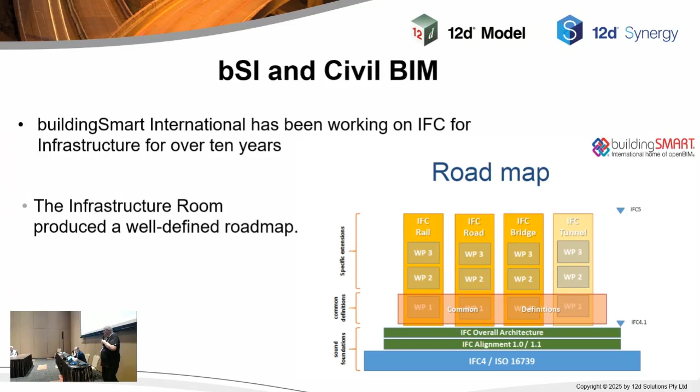Now, with civil, buildingSMART International got involved a bit before 2015. They came up with this infrastructure room where they had a roadmap of how they were going to build on it. They also had the various summits saying that IFC should be used at every stage of the project, from the very beginning right through to the very end. That really means it needs to include data from surveyors, concept and detail designers for road and rail, construction and handover. That's what they've been telling us ever since I first joined.

Right, have I got the right one up here? Yeah, that's what I'm seeing.

That's okay. But for the infrastructure, they came up with a roadmap, and basically it had a building where the alignment was at the bottom. Anyone in infrastructure has to align it because you use chainage and offset to reference everything. You don't use a grid.

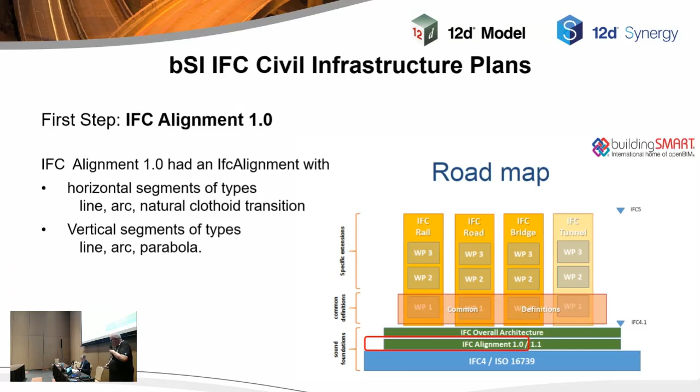So alignment 1.0 was the first thing we did, which had an alignment with horizontal and vertical segments. And basically it was done, and we actually showed that in 2016 in Korea. So that was going backwards and forwards, that's how long ago.

Next was alignment 1.1, which not only had that alignment, but also added in all the rail transitions, because you don't use the clothoid transition, you have other ones. So that was added in, and also tins for surfaces.

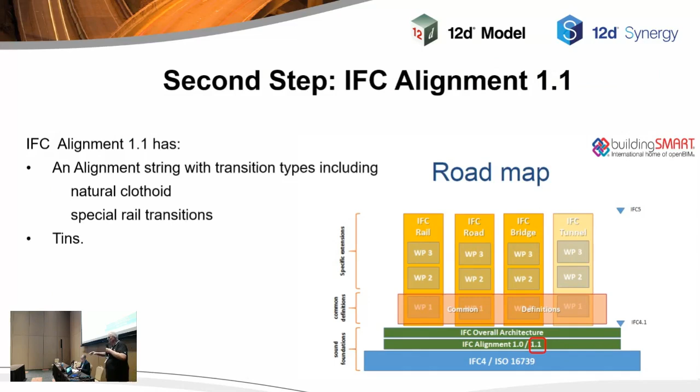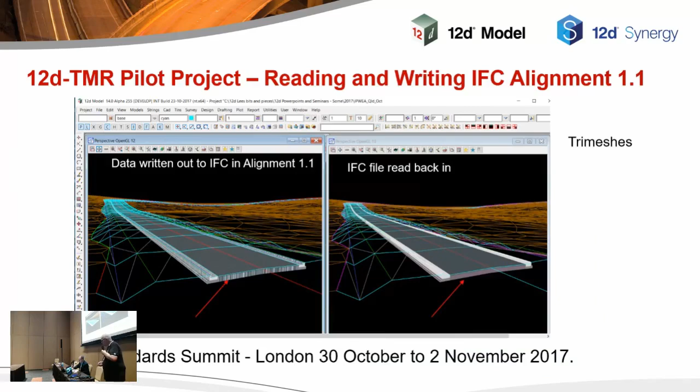So basically that was there for alignment 1.1, and the next year in London, we were passing data around with IFC 1.1, alignment 1.1, and you could pass all that sort of data backwards and forwards, the things you want for a linear infrastructure project.

IFC 4X1 came out in 2018, and it had that alignment, and it also had the triangulation. So that was out there for everyone to use in about 2018.

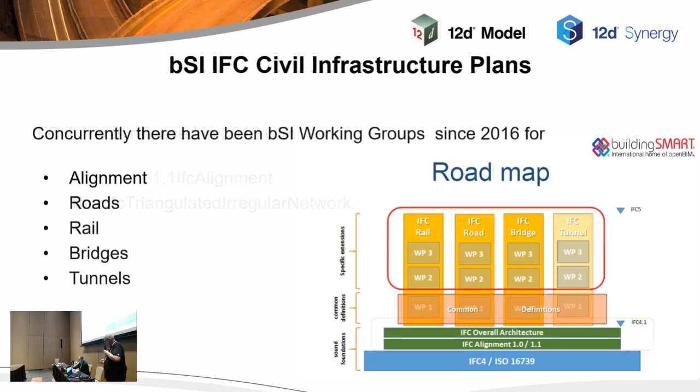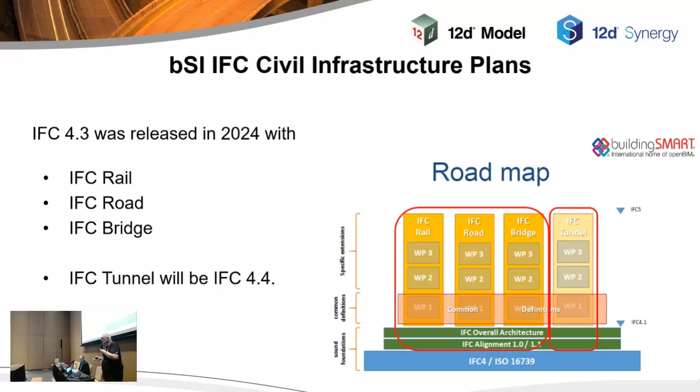At the same time, there were rooms working on alignment, roads, rail, bridges and tunnels. That's been going on concurrently at all these sessions. And 4X3 covered rail, road and bridges, alignment was part of it. And tunnels, that's going to be IFC 4X4, maybe. I think there's a bit of a discussion about that.

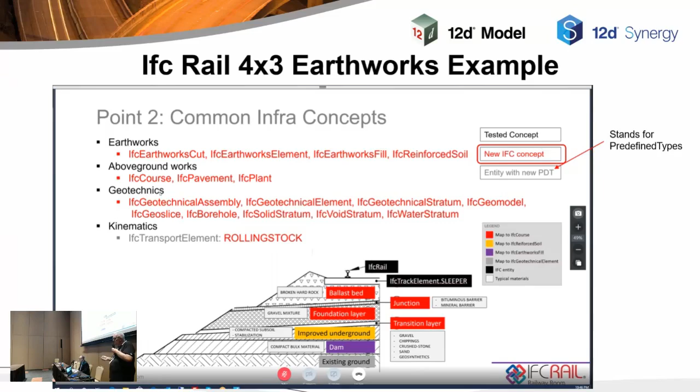What they did though, IFC 4X1 had all what we really needed. They added in a whole lot of other objects, so you didn't have to use building element proxy for everything. So there's things like pavements, things like that were added in. But if you're in the infrastructure space, we all have a name for things. So even if we use building element proxy, you just put that name in there, which you can do, and it tells you what it is. They just wanted all these things over, because some people complain, oh, we've got nothing but building element proxies, but you could still use those.

And here's a job that we did in 4X3, 3 or 4 years ago, and we passed it in 12D model on the left, and we passed across to ACCA's usBIM. And it went all across there quite happily.

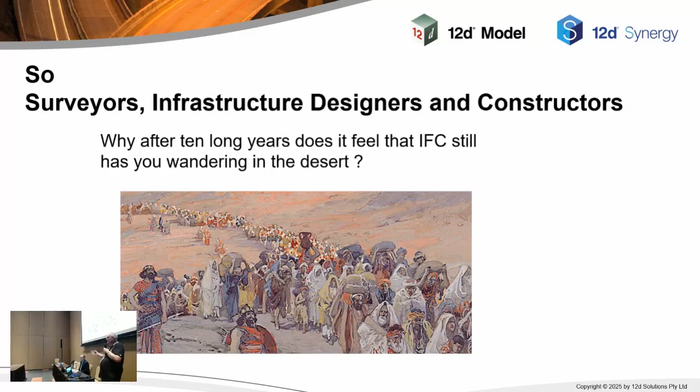Well, surveyors, designers, constructors, it's all there for you. It's all there for you. But why on earth did you feel that you're still left wandering around in the desert, that no one loves you? And basically, these IFC priesthood, they seem to have a special view of the world. And they do. They think the world is flat. End of story. That is how they look at the world. And they take that flat thinking and use it for infrastructure.

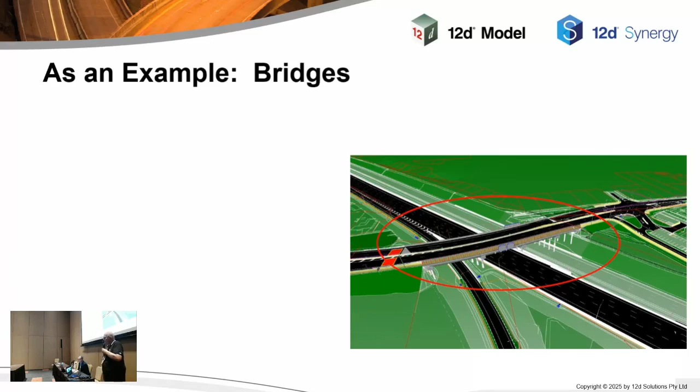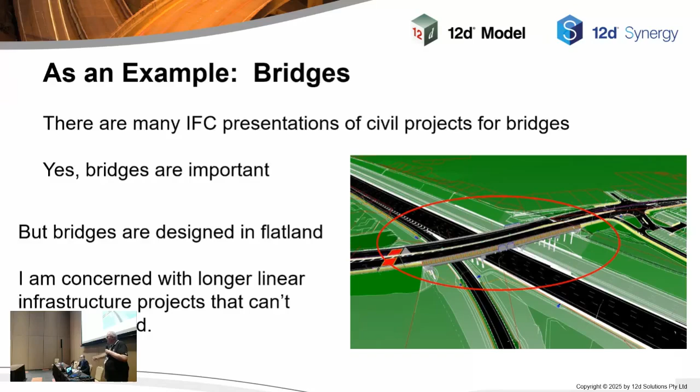Another thing you see a lot of examples are bridges. They trot these bridges out as being a fantastic example of infrastructure. Yep, they're valuable, but they're all designed in flatland. You talk to your people about what they do with a bridge, and it's usually designed in flatland. So it's not an example of what we're interested in, which is long infrastructure, road and rail projects. So throw away any bridges if they tell you that's what they're doing for infrastructure.

How did I get involved in this? Well, it was actually when two buildingSMART people came to see me, and they had a normal project. This is when I first learned about flatland. They had all sorts of weird problems there, like can't bring together different floor levels and stuff like that, which we never have in our area. They came along with this project. There's a couple they had, one at UTS, where basically they'd had all the buildings modelled and put them all into whatever they had. And when they got to the end of it, they brought in cadastral data, the boundary data, and it didn't fit. So they come to say, what is going on?

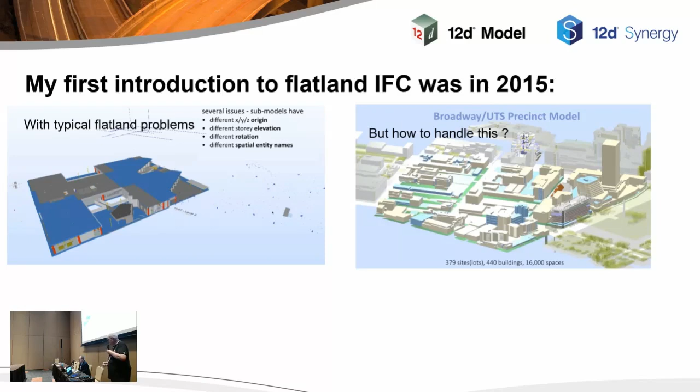Well, since you're all civil people, you'll look at that and say, there's a few things in there that building people never worry about. Basically, they've got a whole lot of sites in there, a whole lot of lots, hundreds of them. You need to know exactly where they are. Usually for a building, they've got one big boundary, end of story, go home.

The other thing is you've got large distances, and that calls up georeferencing. Georeferencing has been my passion here since 2015 when I first brought it up in the infrastructure room. And it pains me to know that I'm still having to talk about it.

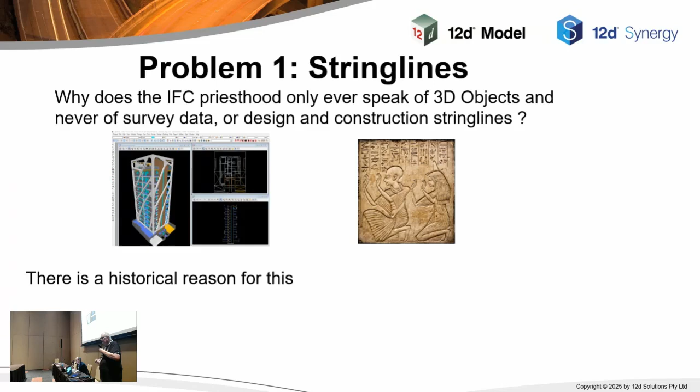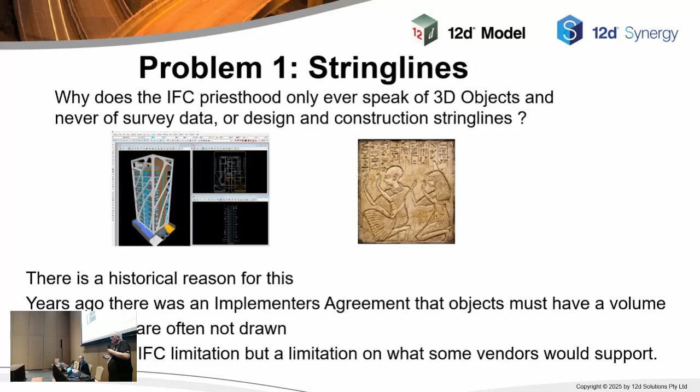Another problem is what we call string lines. In Australia, we call those strings. Again, the IFC priesthood never talk about string lines. This is like a polyline or something like that. Oh no, we only talk about 3D objects. You say, well, what's so hard about a string line? Again, I looked into this because I could never understand it when you give data to a company that they couldn't read it in. We had to put string lines out as little fat pipes. I've never seen a contour line that's fat. So what I discovered, there was an implementers agreement between the vendors that they'll only draw things that are in 3D. So I looked further into it about, well, yeah, what's going on here? Can we really do anything? Or is that the way the world is with IFC?

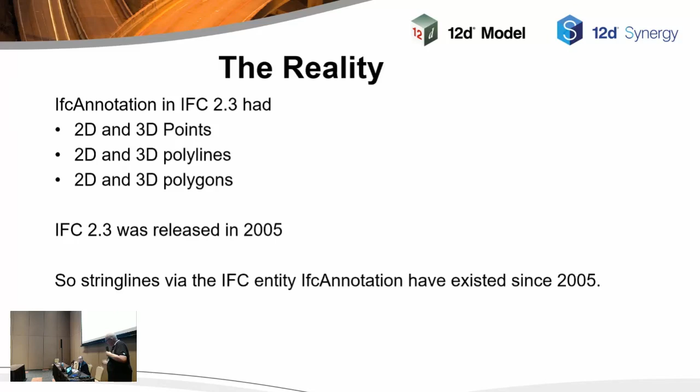And it turns out there's a thing called IFC annotation. It was in at least it was in earlier than 2x3, but it was in 2x3. It's got 2D and 3D points, 2D and 3D polylines, 2D and 3D polygons. So this stuff has been in there for at least 25 years because it was in even IFC 2. So they were there, and you can see how much building people thought about them. They called it annotation, that's all. It tells you, but they're there. They're there and they've been in the standard. And again, we've got a string line here, which we passed across to ACCA usBIM, and it comes across quite happily. So that does exist.

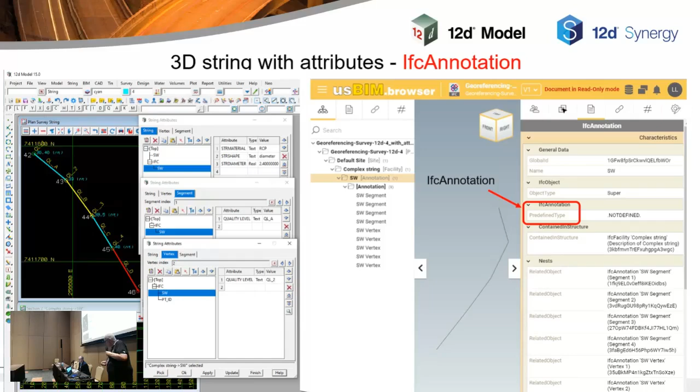The big tragedy of this buildingSMART looking at things is first GIS. What does GIS have? Basically, it's primitive. It has points, polygons, and polylines with attributes. And an attribute is just a property set. That's all it has. Lately, they've been able to take in what we call a tri-mesh. That's only new. So that's all available as IFC annotation. So you could have been putting that data out and they should have been able to consume it from 2005.

The next tragedy is machine control. Machine control, what does it want? Alignments, tins, points, lines, and polygons. They don't want this crappy 3D looking thing. They want to know a point where that bloody thing has to be dug. They want to know the edge of bitumen and stuff. Again, even alignments came in 2016, so that's all what they wanted. It's all been in there from at least 2016.

So I'll just go through a bit of a typical project, just to give you an idea. And since we don't have many architects and others, you'll know all about it. So this is a simple road. It was done in Sydney, 40 kilometres of dual carriageway. And always, these things aren't out in the middle of nowhere.

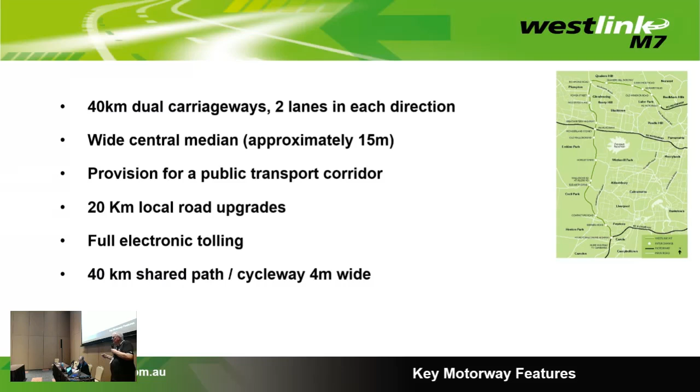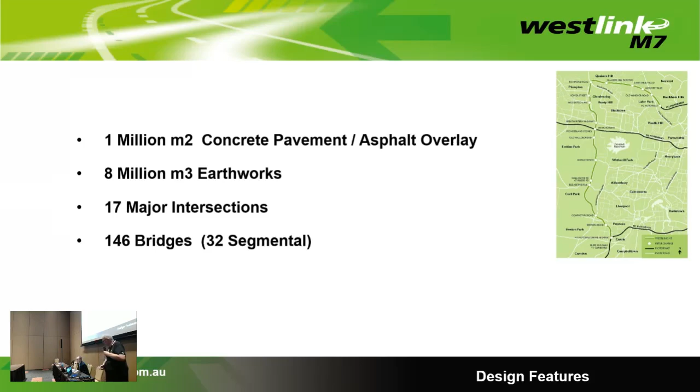They might be there, but they've still got to tie into local roads. So there's 20 kilometres of local road, and these days they have to throw in 40 kilometres of shared bicycle ways and things like that. So you've got about 100 kilometres of design going on this thing. There was about 1 million square metres of paving, 8 million cubic metres of earthworks, and 146 or so bridges. So there's lots of stuff in there.

They got 8,000 drawings. What did they do with those 8,000 drawings? Threw them in the bin. Useless. What they did instead - because the people doing design have had a way of getting 3D data around in Australia since the 80s - they went to the designers and got their string lines and their points and things. From that, they were able to construct all the layers for all the pavements and everything else. So they had a full 3D model to construct from. The drawings were a waste of time.

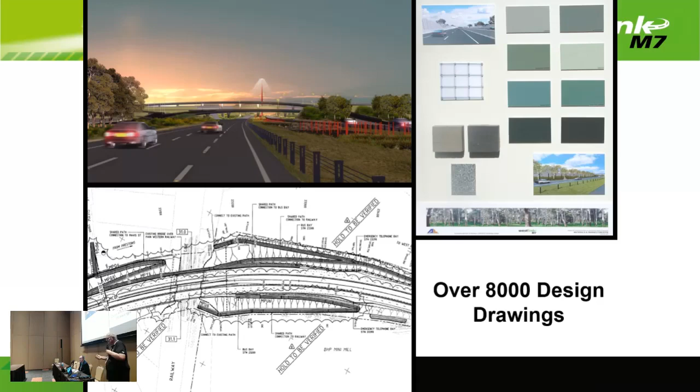Here's the difference. Here's one of the sites where they're building this. And the buildings people, it's usually a fairly small site with not much going on. Out there, you've got massive machinery. We restrict who goes on that site. You don't have all these bods wandering around, they'll get killed. Massive areas. So that's one difference that's there.

We've got to know where we are at all times, because you've got a 40-kilometre project, but you start at different places, so you've got to make sure they meet up. So it's very important to have the one coordinate system. And I tell you, when tunnels don't meet up, people really are upset. On the roads, it's not too bad - you can look and say, oh, I'm not quite there, and adjust a bit, but not in a tunnel.

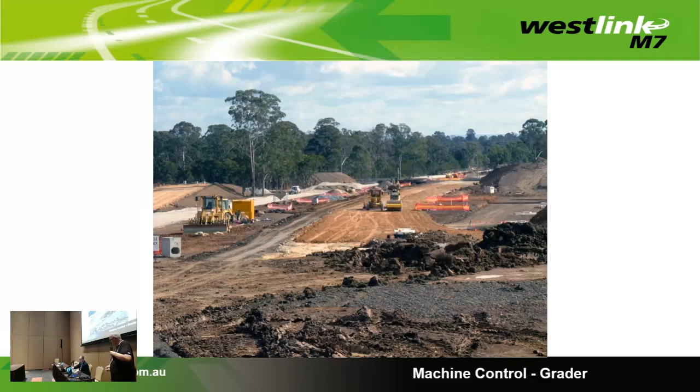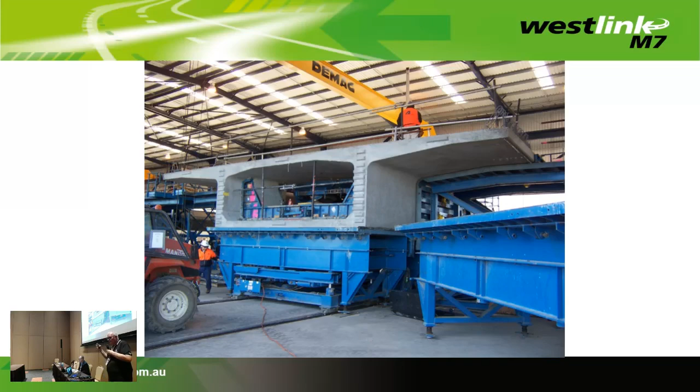So this is the sort of site we've got where there's nothing on there to tell you where you are, because it's all bulldozed down. They use segments of bridges - these are all different, every one. They built special machines to control them, and the surveyors made sure they were correct. They had to build their own substation there for all the power they needed. These are massive projects. Here they put those bridges in - this is one of the bridges things they were doing.

And when it came to the paving, they're using machine control for the paving. That's the sort of thing you've got to control. Now, basically when you do this stuff, the finished surface has to be plus or minus 10 millimetres, and they go around and survey it everywhere to prove it. So over the 40 kilometres, you can only be out in height by plus or minus 10 millimetres - you can't even get someone to swing your frigging door in a building to that accuracy.

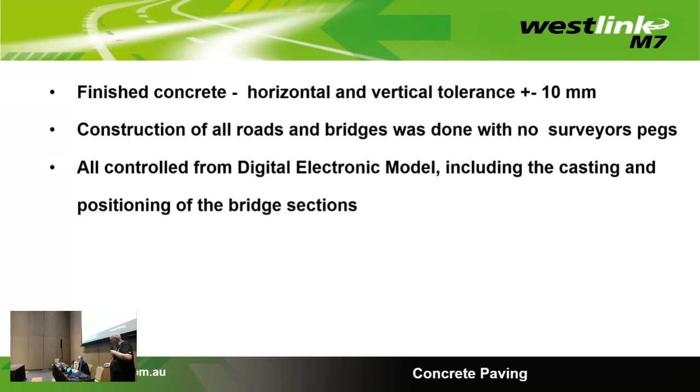The construction of all the bridges was done without survey pegs. All the control for everything, including all the bridges, was from a digital model, and set out for all the bridges. They saved $1 million in wooden survey pegs. And this thing was done in 2005.

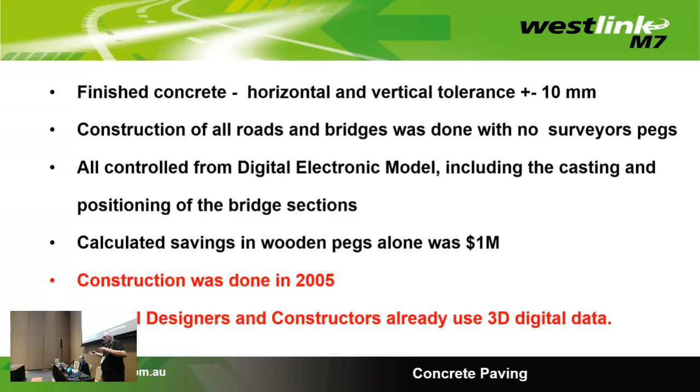So civil people, they know about 3D. They know about machine control. They've known about it since I've been in the industry in 1980 - we only design in 3D. The buildingSMART people who work with buildings mainly did 2D floor levels. We can't do that. We've got to worry about full 3D to design the thing, and we always have. So basically, you would have thought, with that background, it would have been simple for IFC to include all of us, because we know all about this stuff and have for years.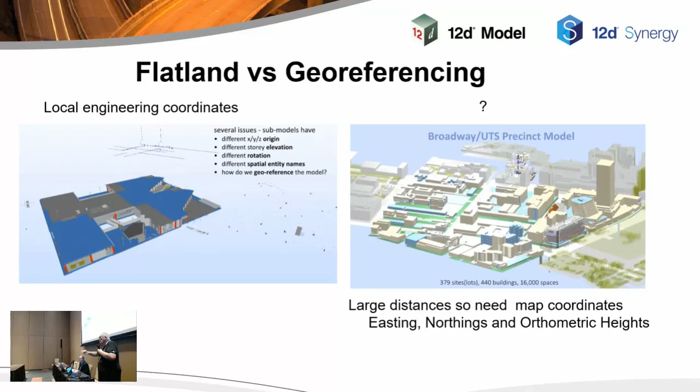So the first problem we had was cadastre and stringlines, which I've mentioned, but the big one is georeferencing. This has been why this thing has never worked, because they will not listen to us people about georeferencing. Basically, you have to have usually map coordinates - easting, northing, and a height on a project. One coordinate system for the whole project.

Now, in case no one knows, local engineering coordinates - that's usually what buildings work on. They put a 0, 0, 0 somewhere, and you measure things from that. So it's local engineering coordinates, usually working in a tangent plane. They even say things like the z-axis is perpendicular to the other two axes. No problem if you're working locally - even Einstein, my doctorate's in space-time relativity, Einstein said that locally everything's flat. Locally, special relativity works. If you're going much larger, you need general relativity.

As long as you keep in the small, there's no problem to be flatland. But just look at this - you've got a curved earth. You set up something on a tripod that's vertical, you shoot with a laser, it goes straight as a die. And if you look at that, once it gets out a bit, your heights are all wrong because it's curved on you. So you're going to be wrong if you don't allow for curvature of the earth.

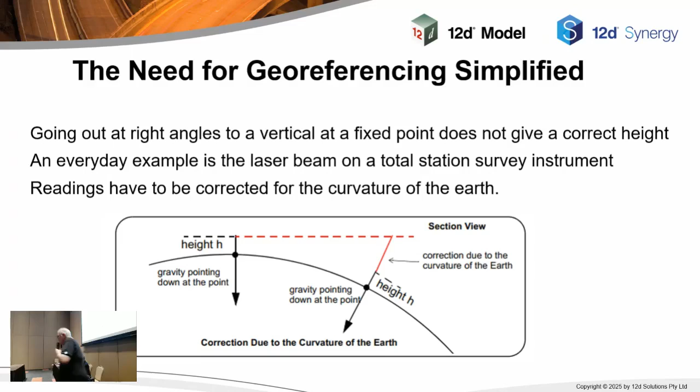Luckily, when you're using those laser things in the building, the distance is not very far, so it's not going to be too bad. How do we use georeferencing?

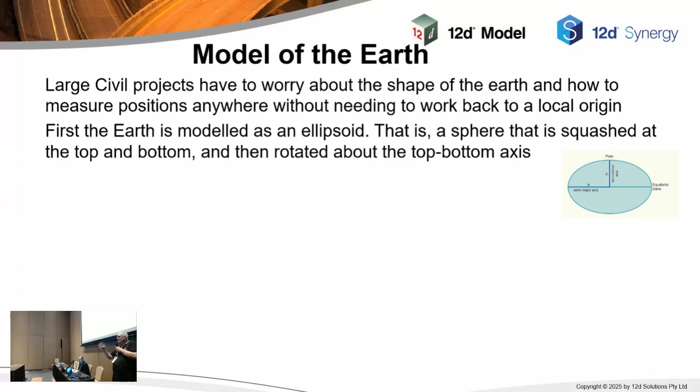We have to have a model of the Earth. What we use is an ellipsoid, an ellipse, which we spin around on the north-south axis. That gives us our model of the Earth. We then point the axis up to the North Star, because that doesn't move, so that fixes it for us.

We use one in Australia, which most of the world is using, GRS 80, and it's got a mass centre of the Earth, which was not used by many beforehand. They fiddled it to fit better their area, but we use the mass centre of the Earth because the satellites revolve around the mass centre of the Earth, and most people now want to use satellites. So everyone is now using this model. So if you're using GNSS, or if you're American, GPS, then mass centre of the Earth is what you need.

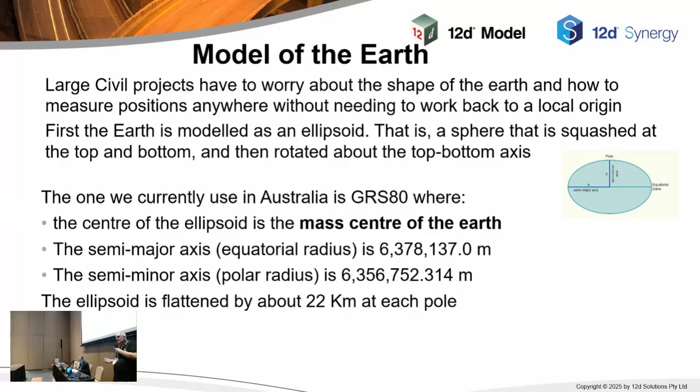And it's squashed a little bit, about 22 kilometres at the pole. But for surveyors, that will make a difference. Right, so we've got that model of the Earth, and we also need some other coordinate system.

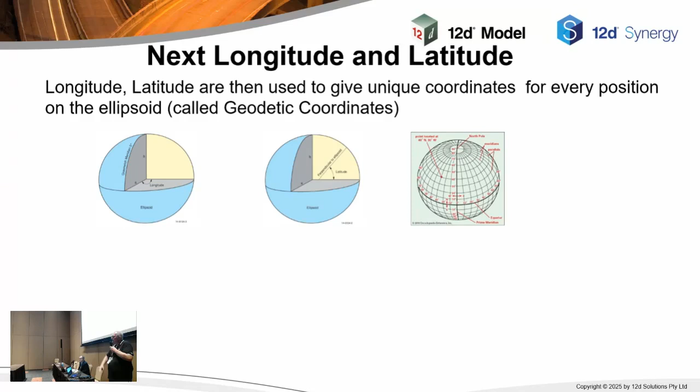For that, we all use longitude and latitude. Longitude, no trouble, great circles measured east and west of Greenwich. Greenwich is the 0. Halfway between the north and south pole is your equator, and latitude is north and south of the equator. Pretty straightforward, except of course, one time Greenwich wasn't it, they used to go through Paris.

So you have to know where your 0 is to play around with it. Those things are called your horizontal datum. So you have to know what your ellipsoid is and where your latitude and longitude are measured from, and that's part of your horizontal datum, which is all very good.

In Australia, ours is GDA 2020. One little problem - it is critical to know that. And the reason it's critical is that even in Australia, we changed models of the Earth.

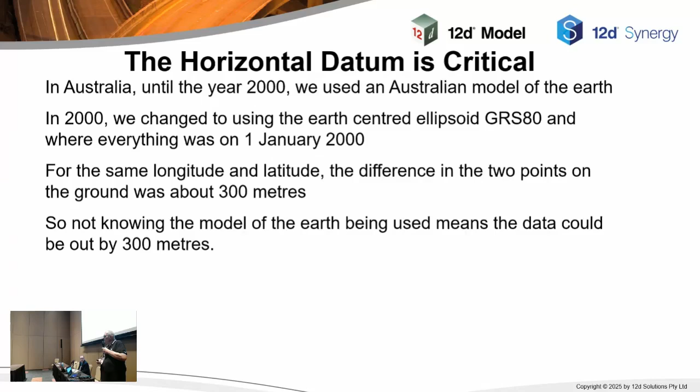Coming up to 2000, we had a different model of the Earth. And when we changed it, the longitude and the latitude of every point in Australia changed. If you use the wrong one, you're out 300 metres. So you really had to know what that was. We changed it again in 2020, where the difference there was about 1.8 metres.

Now, why on earth does it keep changing on us? Because of continental drift. Maybe if you're in London, you're lucky, but in Australia, we're moving towards the equator and away from London about the same rate as your fingernail grows. And over 20 years, that became 1.8 metres. And these days, if you're driving a self-driving car, you do not want to be 1.8 metres on the wrong side of the road.

Well, most houses in Australia are built up to 1 metre of the neighbour. So if you're 1.8 metres out, you'll be building on your neighbour's property. And that is not a good thing.

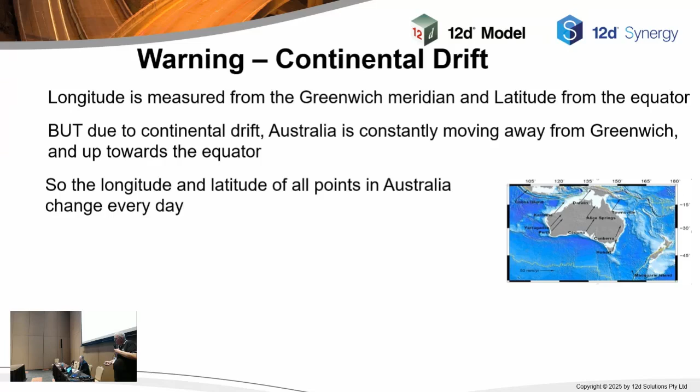So basically, for that, we not only have to know what model of the Earth, but we also have to know when your data was picked up. And that's called an epoch. Remember that word, epoch. For Australia 2020, it's where things were on the 1st of January 2020.

So when a surveyor goes out there and picks up data, he'll pick up what it is today, if he's using satellites. He then has to adjust it to where it was on the 1st of January 2020. So it's not quite straightforward what surveyors have to do, but that's all the information you need if you're going to use a horizontal datum. So all those things are needed, otherwise you basically won't know where you're going.

So I noticed they talked about, in IFC 4 I think, they said it's georeferenced - you've got a longitude and latitude in there. You need to know what the model of the Earth is, what longitude and latitude you're using, and what's the epoch. Otherwise, you could be out 300-400 metres at least.

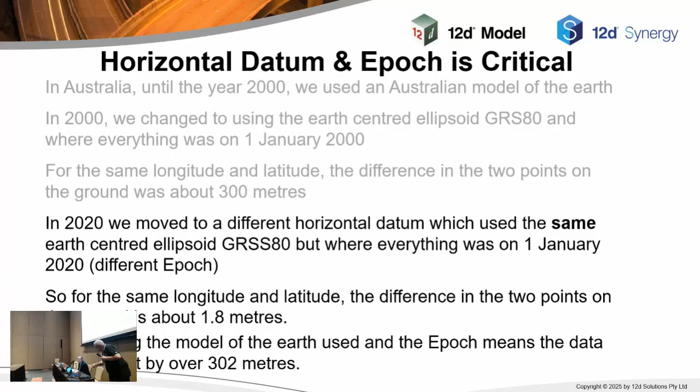Sorry, I'm having trouble reading what I've even got there. Yeah, it's saying the same thing.

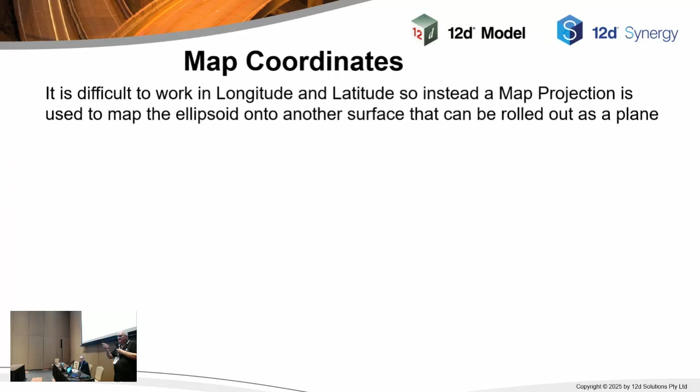Using longitude and latitude is very difficult, so we use what we call map coordinates. You take some sort of object that you can roll out on the flat paper, and you map by going through the centre of the Earth, through your point, onto that paper to give you coordinates. That's called map coordinates, usually called eastings and northings. You use different projections depending on your data—the conical one's used for Lambert, I think, for east-west coverage, and if it's north-south, you usually use the transverse Mercator.

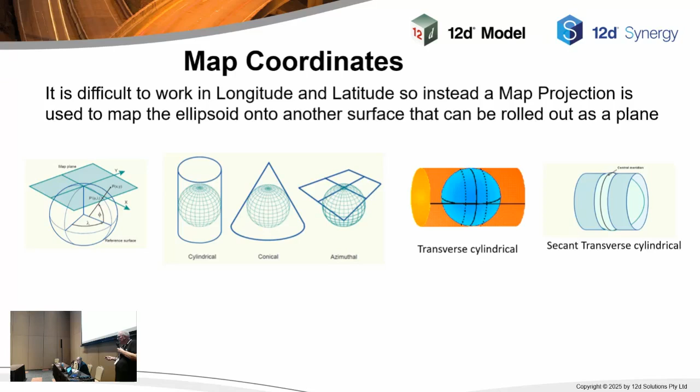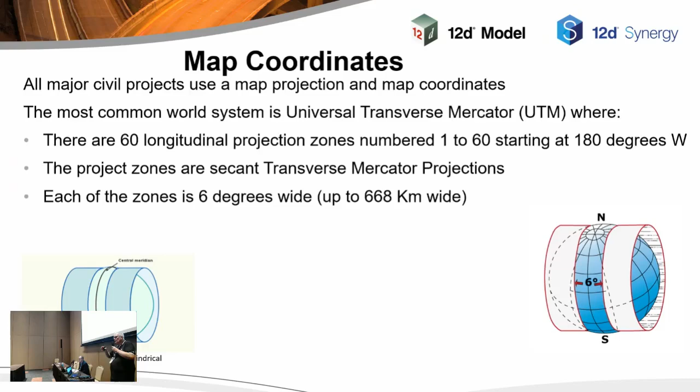There are all these different map projections you can come up with. A common one we all use is the transverse Mercator, called Universal Transverse Mercator, or UTM. It's a cylinder on its side, working in 6-degree zones. They've got a central meridian going around the Earth, and you go 3 degrees each side. It's only about 600 or 700 kilometres maximum, but as you go up toward the equator it's bigger, and toward the poles it's smaller. Once you have those, there's a zone—60 of them going around the world.

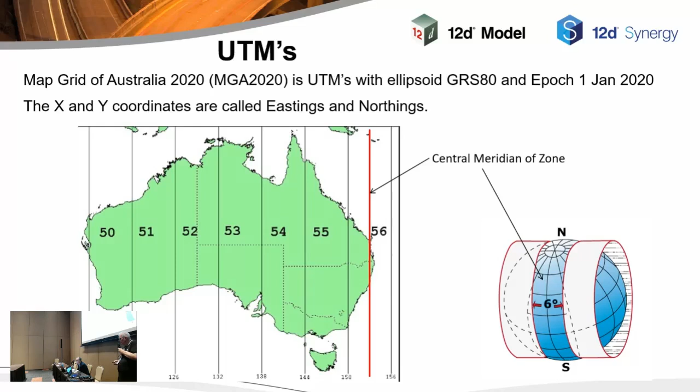The Americans had this after the war, I think—this is where it came from. But most of us use it, certainly in Australia. We go from zone 50 to about across there; there's a number of zones in there. Because we're fairly wide, about 3,000 kilometres wide, I think.

Anyway, UTM—that's a coordinate system. When you have map coordinates, this is what it's really about: you've got your flat bit of paper and your curve, and if you've got 2 points, P1 and P2, you go through the centre of the Earth and through that point onto your plane, wherever it hits—that's your map coordinate. If you look at the diagram, P1 and P2 map onto P1 dash and P2 dash. Now, the horrifying thing is that flat plane is your map coordinates, and the distance on the plane between P1 dash and P2 dash is different to the distance on the ellipsoid between P1 and P2. That's the horrifying problem with georeferencing.

It's even worse than that, and this came up in a talk earlier today. On that line that goes through the centre of the Earth, nothing's actually on the ellipsoid—you keep going up to a certain ellipsoid height. If you go up, say, to 100 metres on each of those points, the ellipsoid height means they'll be even further apart than before. But they all have the same northing and easting. So it's not just the northing and easting—height is critical as well.

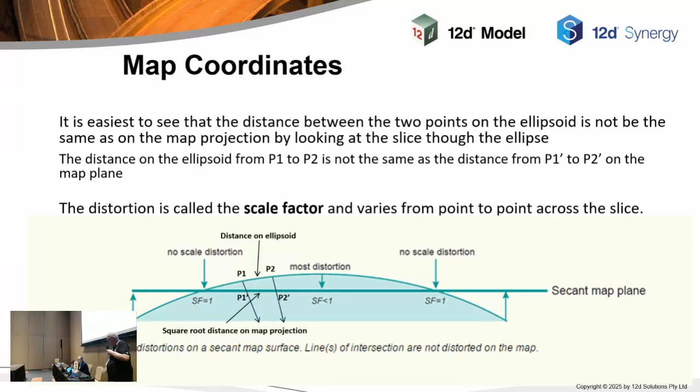So they call it a scale factor when you look at that ratio. People do quote some scale factors, but I'll tell you why most of them are wrong. In AMG/MGA, which is what we use, it's a UTM system. With that scale factor, 0.9996, it's out about 400 millimetres per kilometre. You wouldn't think it's very much, but if you're working in tens of kilometres, you're out by metres. So that has to be remembered.

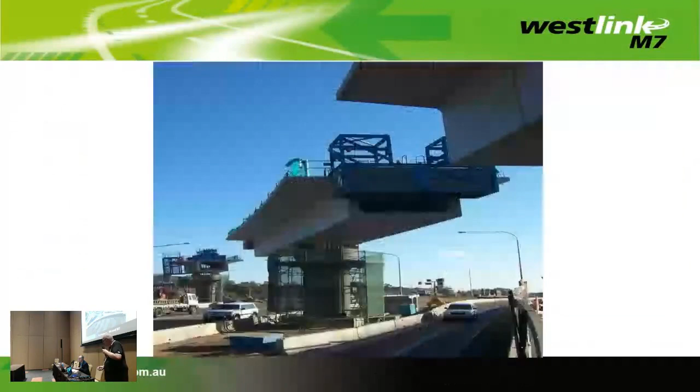Now, I did not put the hard stuff in there. The hard stuff is it does depend on height, so you also have to take height into consideration. And then you don't actually have just a scale factor—it's a combined scale factor. So you have to combine the two to go from one to the other.

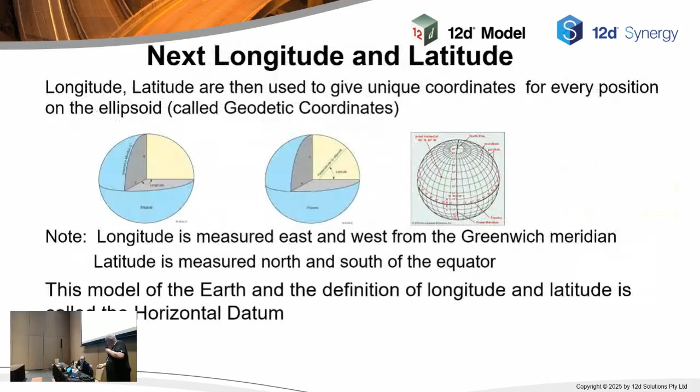Gone too far back. Yeah, I'm coming forward, aren't I? What slide are we on, do you know? No, I'm not sure.

Oh, look at that. Quick reviews just so I can test you out. Right.

So you do have to worry about heights, but it's worse than that. Where I spoke about there was ellipsoid height, but no one uses ellipsoid heights. We use orthometric heights, i.e. the way water flows. If you used ellipsoid heights, water would sometimes have to flow uphill. We use the gravity model of the Earth to give you your heights. It is not perpendicular to your ellipsoid, so there's another correction coming in.

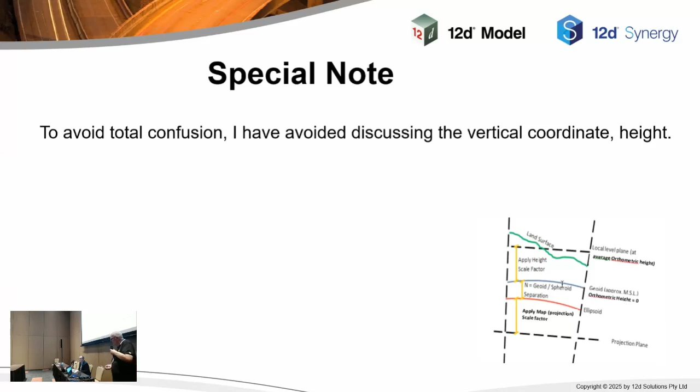So when you start talking about heights, it's different again. You have to have a special vertical datum to say what you're using, because we don't use ellipsoid heights. So basically, with this stuff, do not be overwhelmed. Most civil designers and things like that do not understand it either.

I don't like putting water in new electrical equipment. I have a tendency to knock it over.

So this was not a problem at all when surveyors handled it. But people like buildingSMART and that, they start talking about large projects, digital twins. You can't have a digital twin in flat Earth. You have to have it in coordinates. Talk about GIS, it wants map coordinates.

So it was all very good when you didn't try to bring data together. Most of you will have seen disaster when people bring in data from different projections and things like that. Now, I was in one talk many years ago, and a person said, look, we worked on the cross-city tunnel, we just did that in flat space.

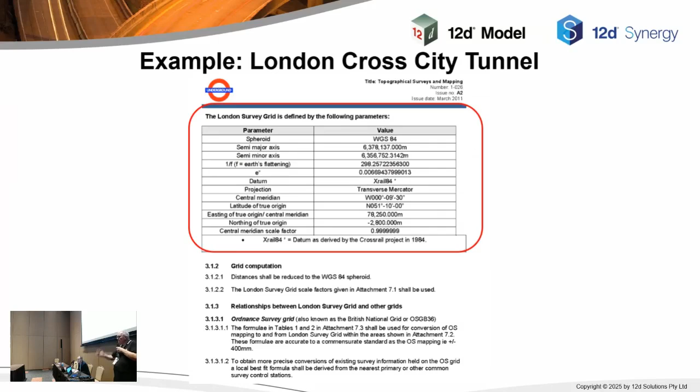I thought, oh, yeah, right, maybe. So I went and looked up the things. But if you look and read the survey brief, it tells you, you are working in a map projection. It even tells you what model of the Earth you have to use. And they fitted it a bit so it works well on the London thing, but they were all working in a map projection. Most of them in the room did not know that. They even gave you, along the route, a correction in parts per million that you have to adjust for.

So that was all there. And when you're putting out buildings, they had marks everywhere that you had to use. You can only be out by about plus or minus 5 millimetres, so it had to be very, very exact. But most people did not know. That was worked out for them by the surveyor.

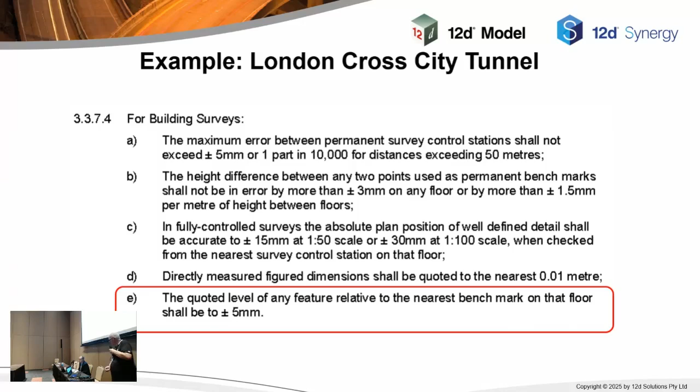So the horrible truth is, in summary, if you've got map coordinates and you work out the square root distance between them, that is not the same distance as on the ground. So you get really screwed when people pass data backwards and forwards and wonder why there's a difference. Now, in timing here, I'll jump over some of this. So basically, you've got to be careful and know what you're doing.

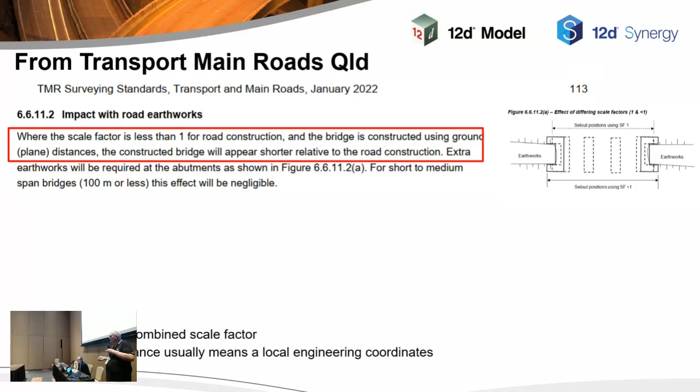The people, why would they know about this? Well, even the main roads authority for the last 100 years or so have had in their book that if you've got a bridge, which is usually done in flat land, and you've somehow moved across to your map coordinates, depending on the scale factor, it could be shorter or longer. You've got to worry about that, and it affects your earthworks. So it's not as though this is hidden away, it's in their survey manual.

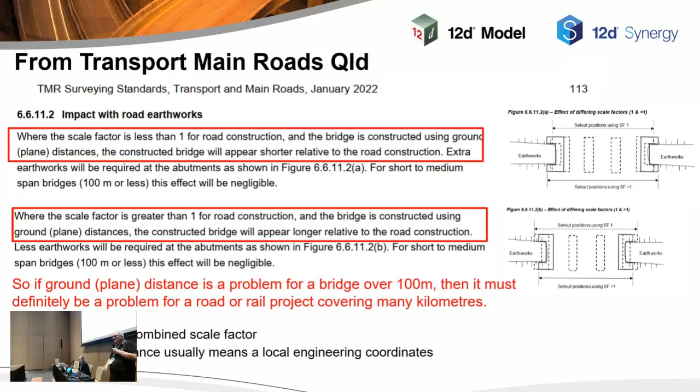So be very, very careful. If your BIM manager does not know about this problem, then they've come from the buildings world, the vertical buildings world. Tell them to go and learn about georeferencing.

So it's critical, absolutely critical for your georeferencing, because all our projects... well, I'll ask the audience, are your projects in map coordinates? Who's not in map coordinates? Do you get trouble when your buildings people give you screwy data? I bet you do.

So basically, you need to know your horizontal datum, which includes the epoch, and your vertical datum, the map projection, and your zone number. You need all those things to uniquely give it. And so basically, that has to be provided for a project to be able to nail it down.

Now, you may wonder why these map coordinates are used and what the relationship to longitude and latitude is. I didn't say, but you can map uniquely between them. So if you know the map projection coordinates and all that information, you can get back to a unique longitude and latitude on the world.

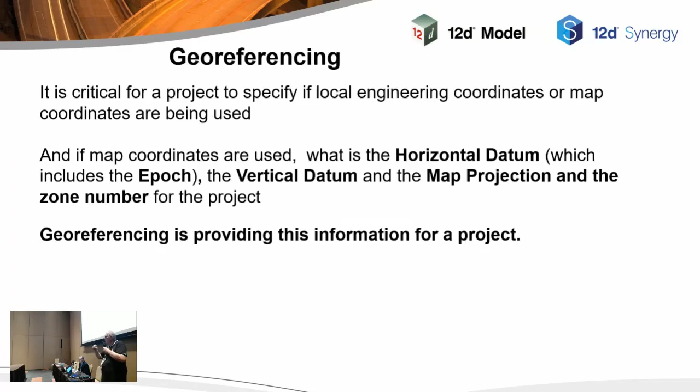So they're equivalent, they're equivalent. You've got all that information.

In IFC 4, I think it was, there's a thing called IFC Projected CRS. Basically, it had the horizontal datum, the vertical datum, a map projection, and zone number. So if there's an IFC Projected CRS, it should mean that in your project, when it's read in, everything is in map coordinates. That's been around for a while.

There's another little thing they had to put in for 4X3, because you couldn't have just Projected CRS, you had to have one of these other objects. They made one called IFC Rigid Operation, and basically this has a translation in X, Y, and Z.

So how that was actually used is that what we use even in Australia at times, and we do this for bridge people, you take your map coordinates and you chop off the whole lot of the leading digits so it's much smaller. You give them that and they work on it thinking it's flat Earth. And what you need, so you're going to translate your data, if you have data that's been truncated properly, you need a delta X, Y, and potentially Z to bring in the proper map coordinates.

So those things are allowed for, and using those two things you've got two cases. If your coordinates are in map coordinates, all you need is an IFC Projected CRS, and you also have an IFC Rigid Operation, but it's just a zero translation in X and Y.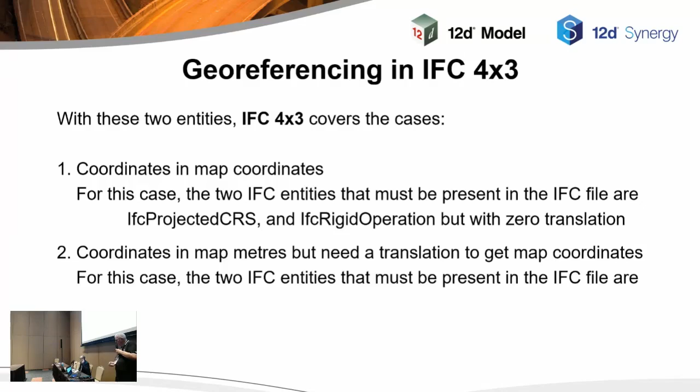You want your data to be absolute, so every coordinate in that file can be checked to see that it's correct and hasn't been screwed up. If you've got translated, truncated coordinates, in that case you still have those same two things, the IFC Projected CRS, but you also have the translation.

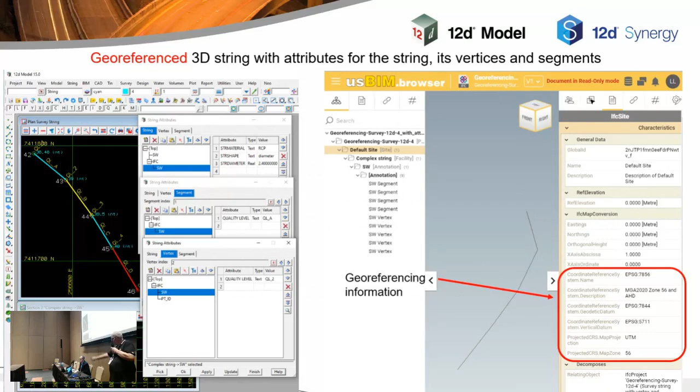So when we passed that data across to usBIM, it had the information in it, and they were actually able to read it and see what the map projection was. So it's all there for 4x3.

There was a test case from 2021, in for the implementers thing. We got a railway from the Italian Railway - I think Evandro came along with this one, which is 33 kilometres long. We had to pass that between the packages.

I hope this is one of the test examples if you're saying you can support georeferencing and linear infrastructure. We read it in from LandXML because it was in map coordinates, had to write it out as an IFC 4x3 file, and then read it back in again in different packages. Over that 33 kilometres, you had to be millimetre accurate, so that end coordinate had to be exactly there to the millimetre. So if you can't do that in your package, do not use it for civil engineering.

So again, we passed that across to usBIM back in that thing, and we were able to read and write it around quite happily. The final thing I'm going to mention is small sites.

I'm not totally against buildings people and bridge people. When you're working on a small site, it's good to just use ordinary rulers and things. Having to multiply them by 0.9993 and work out distances is a little bit nasty, but they're on a small site, so there's no problem - they can just use normal things. They don't have to worry that vertical is not quite vertical, it's close enough. They usually use a plumb bob anyway, which is going to the gravity.

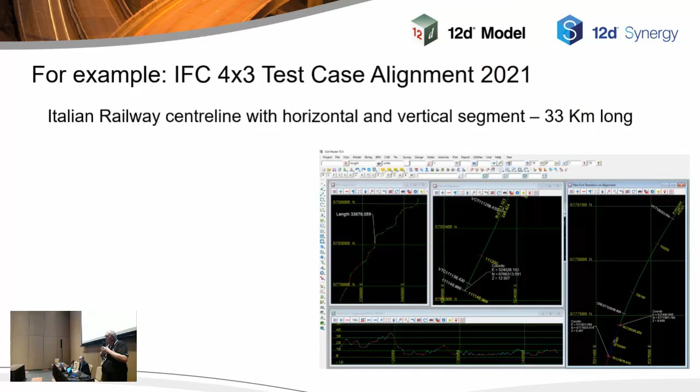Oh man, as I said, I'm a male - I can't handle two things at once.

Tap dance. Right, small site. You get those points where you get them in the local engineering coordinates, but you also get them in map coordinates. Now, everyone, even a building, has a surveyor come out to work out the boundary. You're a bit stupid if you don't. So you can ask them to give you a whole lot of those points in the two coordinate systems if you pick your 0, 0.

So you can easily get them. And from that you can work out a translation in X and Y, a rotation in the XY plane, and also a scale factor that you apply to the X and the Y. That will give you a mapping between a local engineering coordinate and usually a map projection. Every surveyor knows that, and it's usually called a 2D Helmert transformation.

So if you've got that, it can be used to go between the two systems. But it only works for a small site. If you go over a kilometre or so, you're screwed, because those things will change. As long as it's small, everything's right. You also have to worry about heights. You can't have too big a change in height, because that also can throw you out. But luckily for most things, you don't have that big change.

Most people don't realise that with the Golden Gate Bridge in San Francisco, the distance between the towers at the bottom is different than the distance between the top, because they both go up vertical.

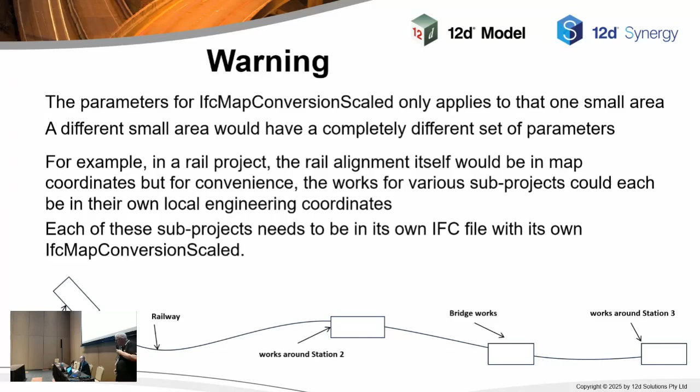So basically, IFC 4x3 can handle georeferencing, large coordinates over large distances, points, polygons and polylines, 3D string lines, alignments, tins — everything you need. So look, this is my coordinates in Singapore.

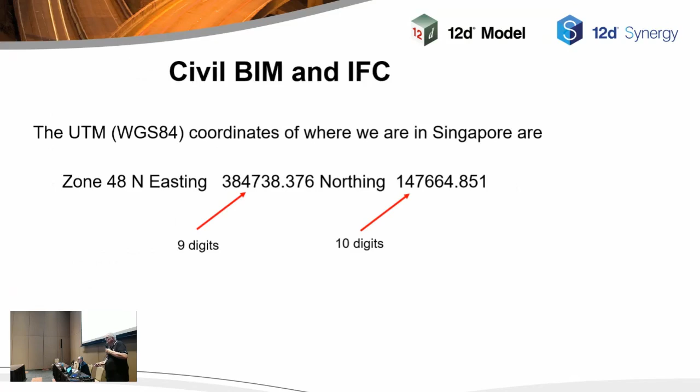8, 9 and 10 digits. If you're working, you've got to have another 3 decimal places at least. That needs 14 places — that's called double precision. If your package has a local coordinate, it's probably not double precision. Do not use it. So if you use Civil 3D or I think Revit, you'll find that if you give them something wild, it starts going wonky because it's not double precision.

So if someone wants to use local engineering coordinates on you, say no. These are my coordinates, not some 0, 0. Those coordinates for Singapore, someone will know where that is in 100 years' time. They'll never know where your 0, 0 was. So basically, IFC can be civil, but it's up to you to demand string lines and don't let them cut off your digits. Thank you.

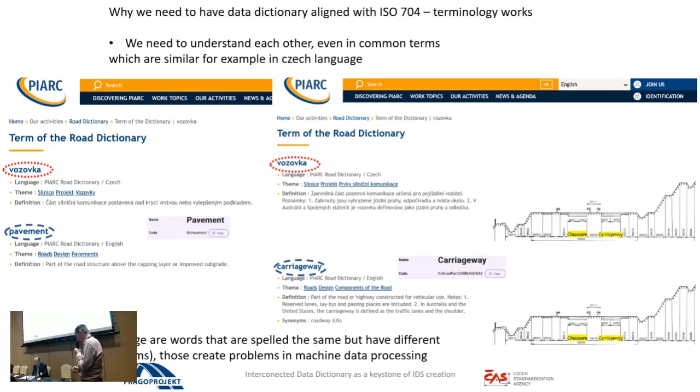That description leads to some new difficulties, because when we start to collect the data, when we start to collect the information, a lot of duplicities appear. It was necessary to find out the procedure how to sort out the information requirements from different branches of the construction industry. It was necessary to clean it.

I guess all of you involved within IFC development know this problem, but for us it was, let's say, new discoveries which we have to use, which we have to refer to, and which we have to fight. Then again, the solution was that most of the problems came from the fact that the data wasn't stored in triplet shapes, which meant there was a problem just to find the right referencing to the sources and to the explanation of the terms themselves.

So that means we worked out and cleaned the data, we built up the vocabularies which were focused on the profession where you are working, and then also we put effort into explaining and creating the definitions for the terms which are used.

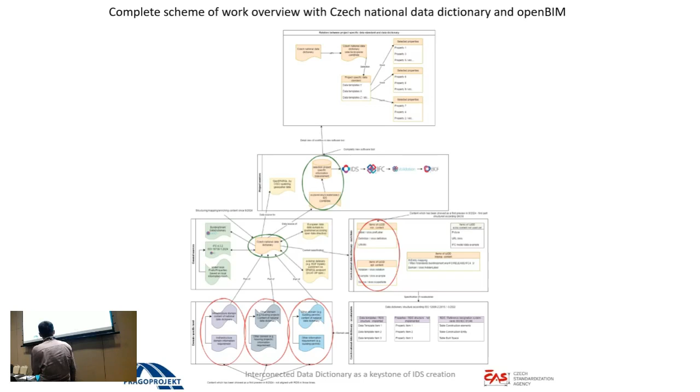Why we need it, or the reason why we created it: every local application has its specific demands, not only in the regulatory process, but also in local customs, local needs, and so on.

So a little better description of the schema of the whole project is here. This is basically the first step where we collect the data - again similarities, different domains, collected data, collected information requirements, information needs.

Then we store it within the local national data dictionary, where you can see what is most important: that the local data dictionary is mapped towards the IFC data model, to use the open and neutral way to share and produce the data, as well as the reference towards the data dictionary for getting a good and useful explanation of different IFC entities, properties, classes, and so on.

One of the reasons, maybe not necessary for users from countries outside of the European Union, is that we have to also fulfill the requirement about open data principles, which tell us which way to share and publish data. That's a description not only on the legal level, but it also has its own technical description, which gives us the information and requirement regarding storing data, which leads back to the necessity of using triplets.

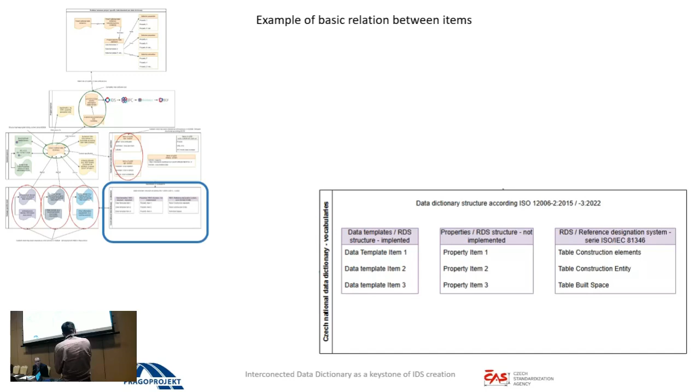This is an example of how we implemented not only the technical standard for creating data dictionaries, but also the technical standard used for defining the classification system or building up the classification framework. The data we collected was also necessary to structure, and for structuring the data itself we use those technical standards, which help us keep the structure and collect information across the construction industry and avoid creating duplicities.

Here you can see how the data looks, and how it's being prepared slowly - not only using the semantic definition from buildingSMART Data Dictionary, but also the local definition according to Czech local needs.

All of this refers to some technical and legal requirements from the side of the European Union, and that's the principles of open data. Because nowadays, even though it seems like a hidden topic, according to this description and needs through the data.europa.eu portal, it's connected to almost 1.8 million data sources, which basically means 1.8 million different independent data dictionaries.

What we think is useful, thanks to this initiative and this technology, is that it can help us deliver to users more information needs about the whole life cycle, because the data sets here are not only from the construction industry, but also from the GIS world, from different cadastral needs, and not only from the point of view of properties and landlords, but also requirements like environmental assets, etc.

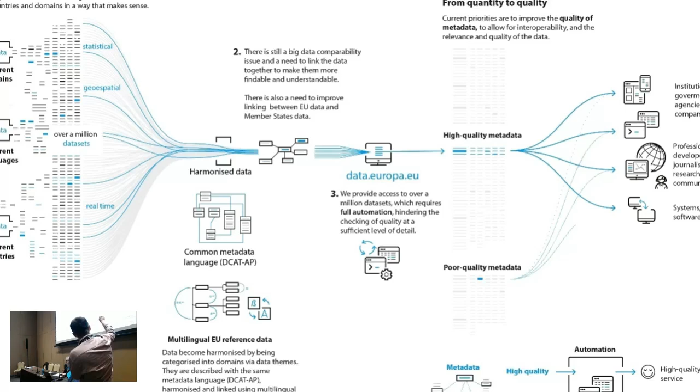Thanks to the fact that we're using this technology, we can access this huge amount of data sets through one same technology, and with our data set in the shape of a local data dictionary, we can provide end users a wider set of information requirements, which can later be used for defining the IDS at the export site.

Here's one of the important things following on from the presentation before - the possibility to use, prepare, and make a database structure for sharing not only the ontology data with terminology as a source for the data dictionary, but also together with OGC, the Open Geospatial Consortium, and its add-on towards the triplet database, to use it like the GeoSPARQL technology.

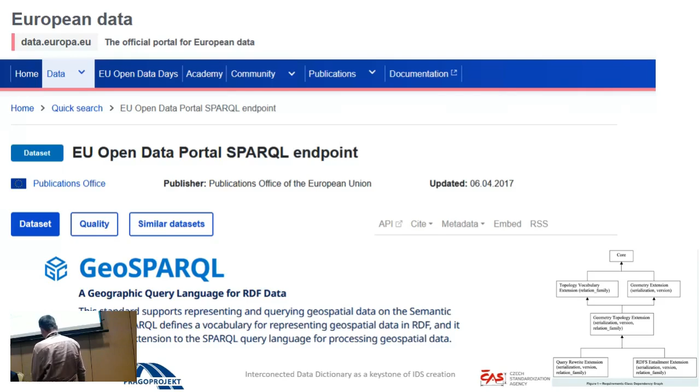This basically helps the user not only work with the data from the point of view of information needs, but also helps connect it with the GIS world, because it allows us to build up queries which are focused not only on items within the data dictionary, but also geospatial information, so the user can combine both. And that also brings another need to write and work with.

But of course we also have to prepare a whole solution, workflow and work set for the end users. So we made some progress in the export tool as well as the tool for administrating the content itself. This was shown at the beginning of the project, last time in a short presentation in Marrakesh. Nowadays the project is much further along.

What's for a slightly more advanced user, of course, is using queries for mining the data from the database and preparing the input for IDS creation. You can also work a bit more with the structure. As I mentioned, the structure itself is well known from the GIS world - there's nothing extra.

Here we are going to the stuff which is completely new, which is nowadays under beta testing, and some screenshots from the tool will be shown later on. And here you can see what is important.

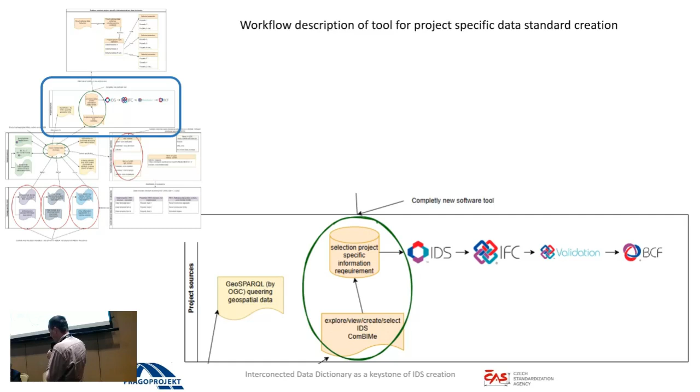Then the user has the base set of information for IDS creation. Of course, IDS creation for the user is user-friendly, meaning we tried to remove the need for deeper knowledge of the IFC data model, because the user just chooses items from the dictionary, like data templates, and then the properties which we need to work with.

Here is a schematic picture about the function of the tool itself. As you can see, it's like the source database, which provides data through the API towards the ComBIMe tool, like the selector explorer of the dictionary.

In the ComBIMe tool, the user can choose the project specific data, meaning choose some items in the form of data templates, and then to each data template the user can add some specific property designed within the dictionary that can be assigned towards data templates. So within the dictionary itself, there's a similar principle as the buildingSMART data dictionary.

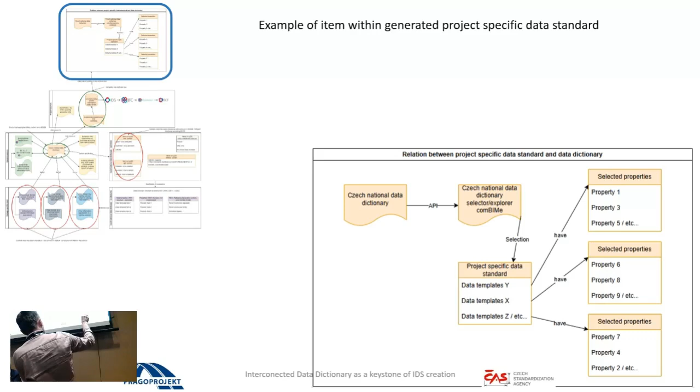There are stored data templates like entities, and the data templates like entities use some properties defined by local needs, and both data templates as entities are mapped towards entities, as well properties are mapped towards the property sets and properties from the IFC data model.

This is, I'm sorry, as I mentioned, it's in beta version. So for now, we still haven't prepared the English version. So just a little bit of description.

The user, somewhere in this graphical user interface, can choose and prepare some kind of construction that he wants to do—whether it's an infrastructure topic, an administrative or housing project, etc. This project, what the user can choose and set up, is based on the structuring from the technical standard as I showed before. In our case, it's the reference designation system.

It's based like CCI. And then within the project—this is an example of an infrastructure project—the user can go deeper and specify if the project is focused on road construction or rail construction, referring to some local standards he wants to follow.

And within the project itself, users can start to build up their own project-specific standard, meaning produce the selection or choose from the data dictionary, like different items or terms, which are equal to IFC entities, but of course the total number is different than in the IFC data model.